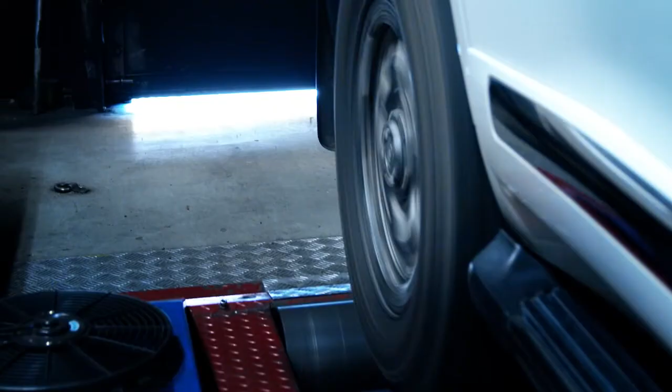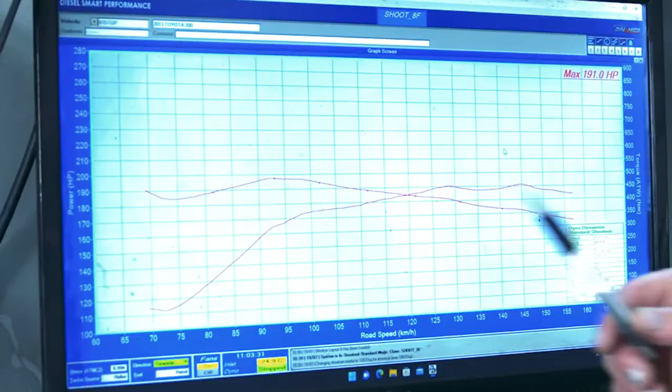So we've just run it up on the dyno stock standard with the 3-inch exhaust already on it, obviously. And this is the standard tune that we're looking at now with the 3-inch exhaust. There is a bit of an improvement when you put a 3-inch exhaust on the 200s. They do actually like that extra bit of flow over the factory exhaust. And you can see here, we're starting in 4th gear at around 70 kilometers an hour. So this is around 1800 RPM. The horsepower is starting at around 115 horsepower and going up to 191 horsepower.

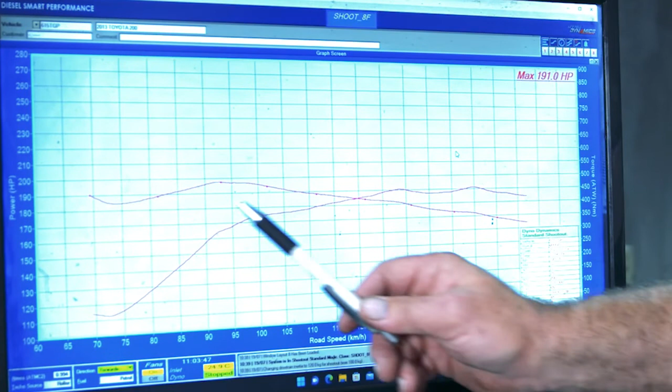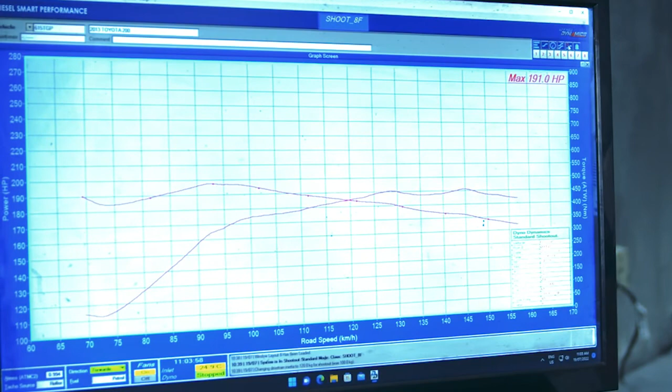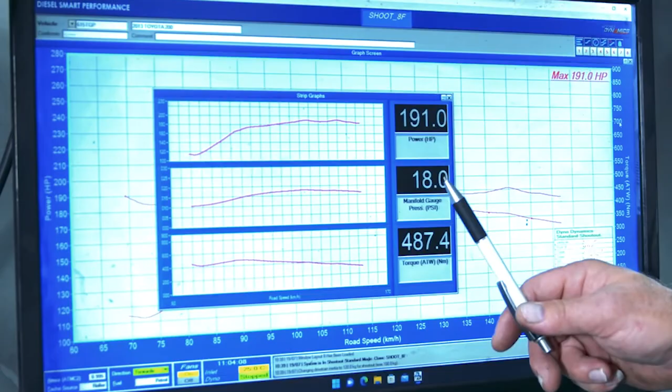And you can see the torque here is starting off at around, if we follow the screen across to this side here where your torque is, 450 Newton meters. I'll just bring it up here for you. So the maximum was 487 Newton meters. And that was at 18 PSI, which is standard boost pressure for these cars. So what I'm going to do now is build the file to suit this customer, where I go in and build individual tables to suit his needs. Then we're going to run it up on the dyno again, so that you can see the difference between the stock tune and after I've finished building the file for the customer.

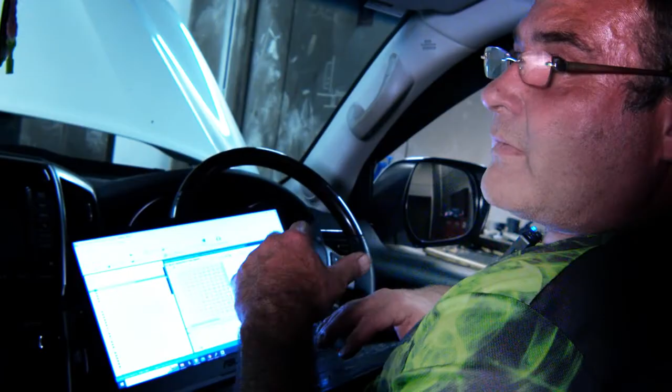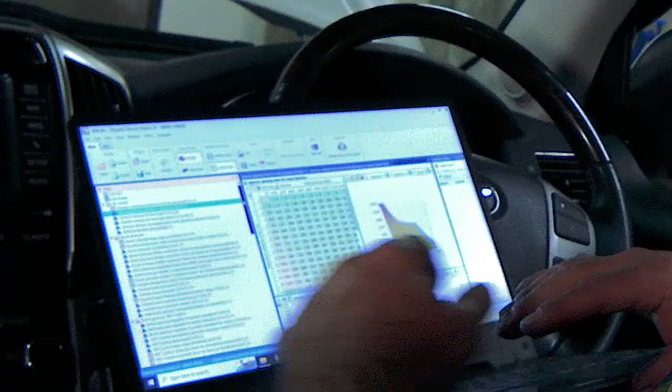Okay, this is one of the softwares that we use to be able to edit all the different tables in the factory ECU to get the results that we're achieving at the moment. I use about 3 different softwares to be able to get access to all of the different tables that I want with the V8 Land Cruiser. If you have a look at the software here, all your different boost tables are for being able to control boost. Your VNT tables, these are the tables that control the turbos. So we're able to change how the turbos come in, and also change EMPs or exhaust manifold back pressures.

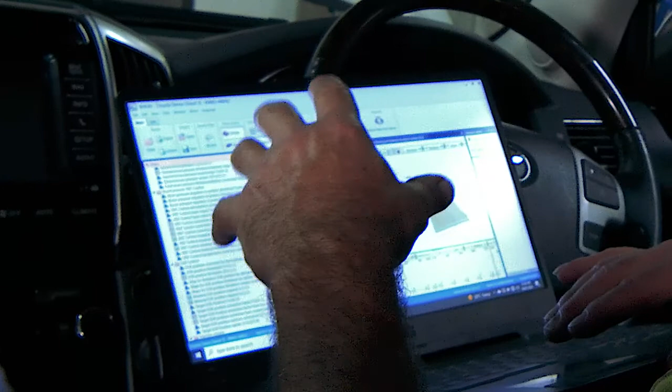So with these tables here, you have to have very, very good knowledge as to what you're doing, or you can actually cause a fair bit of damage to the turbos and also to the motor itself. You've got your EGR tables, injection tables, so this is for your fuel. Once again, very important to know what you're doing with all that sort of stuff. You've got your rail pressure tables here as well. Now with the rail pressure tables, I see a lot of people adding lots of rail pressure to try and get results. You really don't need to. Especially at mid throttles, you don't need to add massive amounts of rail pressure. We don't, and we're still getting the results.

Also, you see here your start of injection tables, your pilot tables, injector opening time. This is your pulse width. The software is quite good, able to look at it in 3D and also in 2D as well. You've got all your DTCs up the top here. This is one of the softwares that we use to be able to tune your car and get the results that we get.

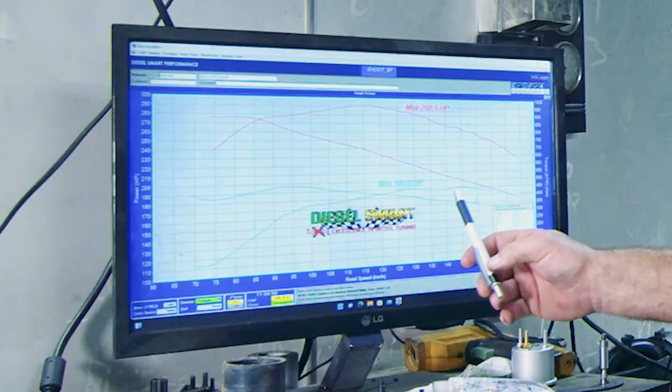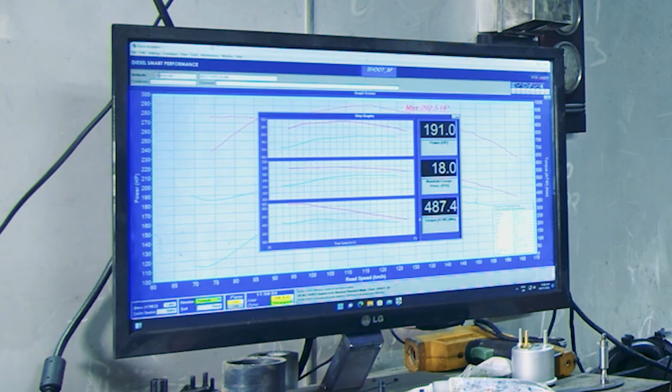Okay, so the tuning is now finished. I'm very happy with the results. You can see here, it went from 191 horsepower factory to 292 horsepower after tuning. The torque was factory a maximum of 487 Newton meters, to 888 Newton meters of torque at the wheels.

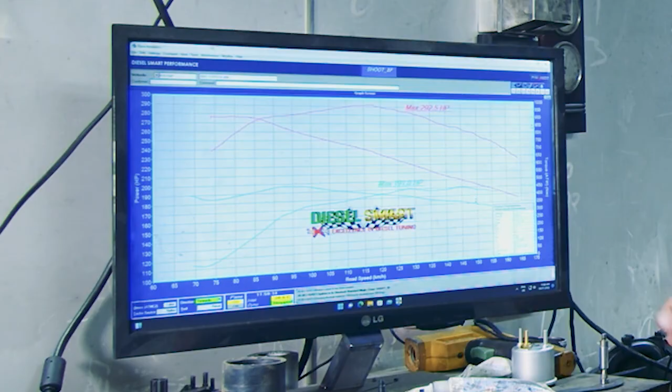So the factory tune here has also got the transmission file in it, so that I can run it in 4th gear with the lockup in. So the torque is read with the lockup in, and also here the torque is being read with the lockup in. Okay.

Just so you get a bit of an understanding on how many times we run them on the dyno, we don't just run them once or twice on the dyno and then send them out the door. When they're being custom tuned properly, where you have to actually build the files, you can run them quite a few times. So you can see here that we've actually run this car 18 times on the dyno, which is around about average from our starting files to what we end up with, a tune file to suit that particular customer.

So what we're going to do now is take it out on the road, and we're not going to so much demonstrate the power and the torque. We understand the power and the torque is there. We're going to show you the difference with the transmission tuning. With the transmission tuned, we're not just worried about it dropping out of 6th gear, which is everyone's main complaint. We've gone through and done a total tune on the actual automatic transmission.

So your shift points, your shift pressures, the converter lockup, when the converter locks up, when it doesn't lock up, when it unlocks. So all of that has been done. It's taken quite a few weeks for me to build it all. It's all personally been built by myself from scratch. And with the 20 odd years of experience that I've been doing these, I can really see that the customer is going to be extremely happy with the results over stock.

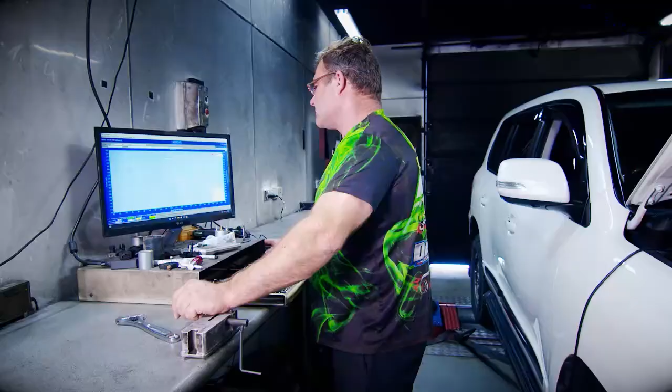Okay, so we've just come back from road testing the 200 series Land Cruiser. Once we had written all the files to the car, so we'd finished tuning the actual engine and we'd also finished tuning the transmission, we like to take them out on the road and actually test them to make sure that the transmission is doing what it's supposed to be doing.

So you'll see in some of the shots that we took out there on the road, the automatic transmission is holding 6th gear beautifully. Up and over hills, down hills, no problems at all. Whereas factory, they will chop and change in and out of 5th gear all the time and even back to 4th gear. Plus they have a tendency of constantly coming in and out of lockup.

So with the tuning of the automatic transmission, I've tuned it so that the lockup stays in. So it doesn't constantly come in and out of lockup when you're coming on and off the throttle. Even if you take your foot completely off the throttle, I've programmed it in such a way that it will still hold lockup. I've also gone into the automatic transmission and sorted out the speedo issue with them. The speedo doesn't read correctly, as you would know. Now the speedo is reading correctly.